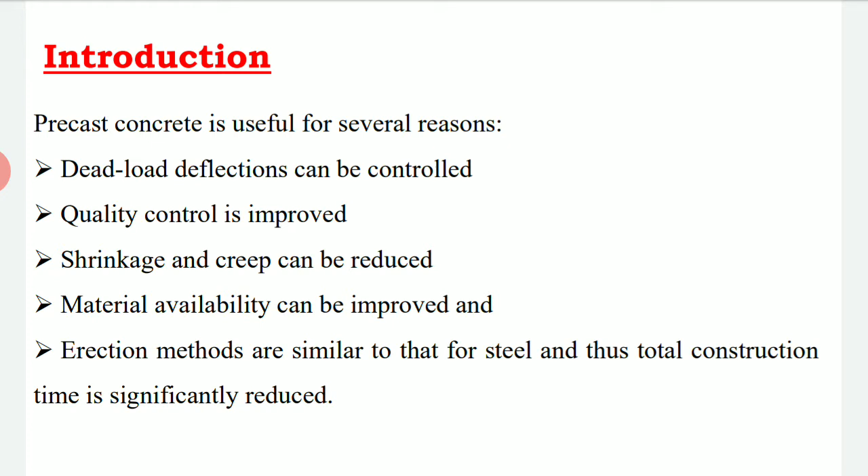So every stage, from start to end, is well planned in the system, so that we can achieve better quality, and even the cost can be reduced with respect to time. So the time also can be significantly reduced in the construction process.

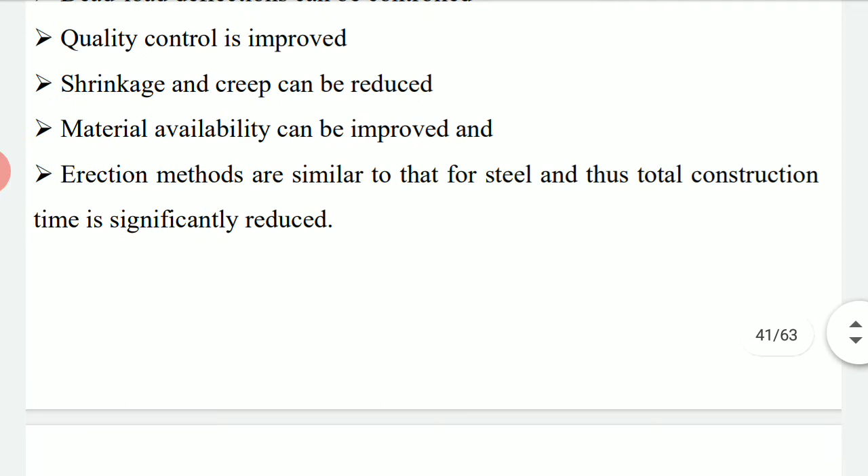Here we are having the different methods in accelerated curing. These are the two main methods used for the accelerated curing process: the use of physical processes, and here we have two different processes - the first one is the physical process and the second one is by using admixtures.

The first one, the use of the physical process, is increasing the curing temperature, that is the introduction of moisture to the curing environment. In the curing process we need to increase the temperature by using heat curing and all, and at that time we can even call it steam curing.

So by using that temperature, the heat of hydration - I mean the hydration process - is going to be increased, and whatever time that hydration process would take, it can be completed earlier by using this increase in temperature.

The second one is the use of admixtures. Here we have different types of admixtures: mineral admixtures as well as chemical admixtures. These admixtures act as the catalyst for the hydration process - catalyst in the sense that these are elements which change the entire reactions in the concrete, especially in the curing part, changing the reaction which takes place in the hydration process.

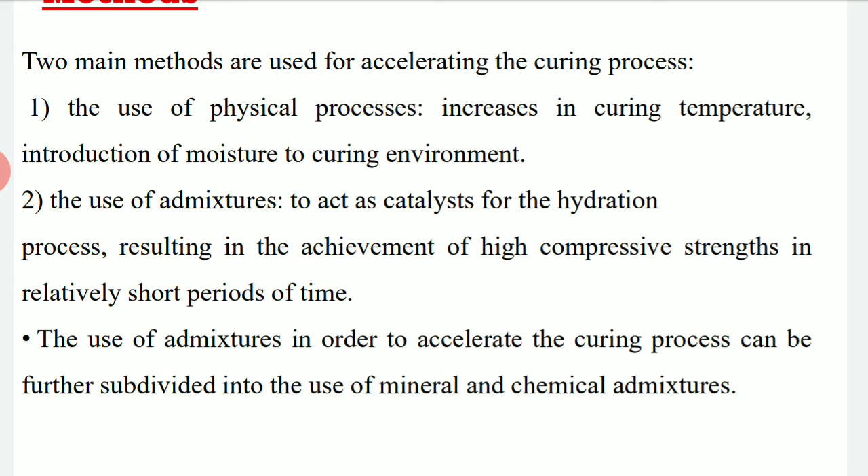Now we are going to study mineral and chemical admixtures, especially in the curing part. The most common mineral admixtures used as an accelerator include silica fume. Mineral admixtures such as fly ash and GGBS are rich in silica content, which acts as the accelerator, especially silica fume.

Fly ash is frequently used to improve other properties of concrete, especially workability, and even the heat of hydration can be minimized by adding fly ash. It has a retarding effect on the initial set and early strength gain of the concrete.

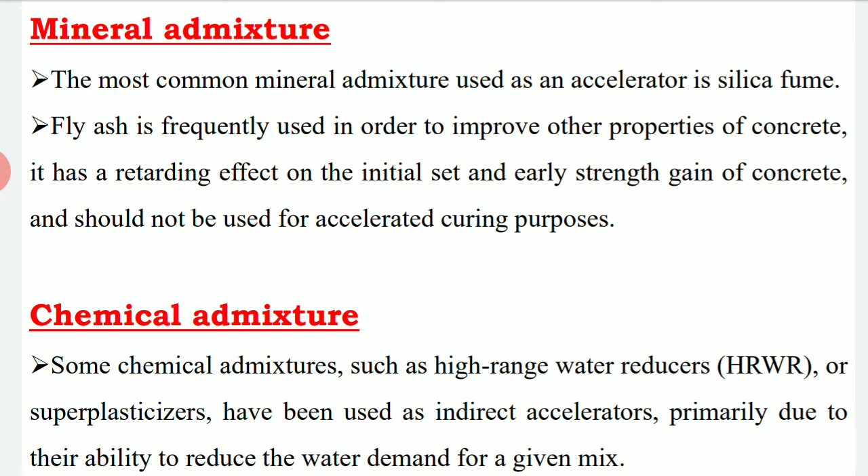It should not be used for accelerated curing purposes. Now coming to the next part, that is the chemical admixtures.

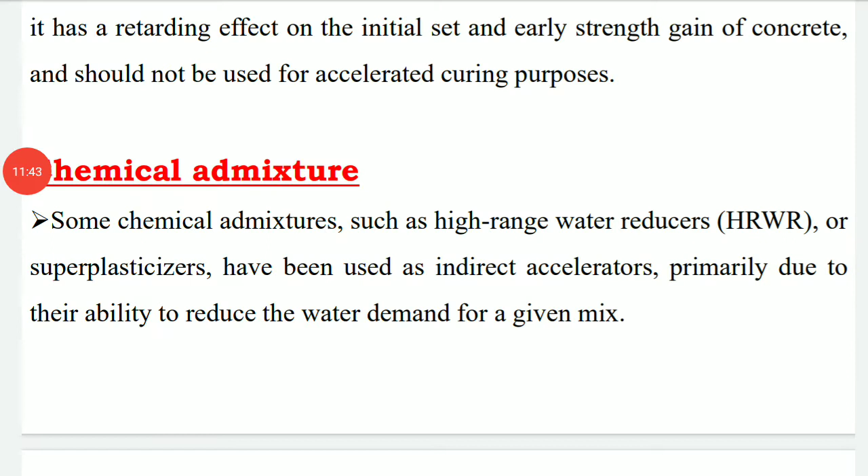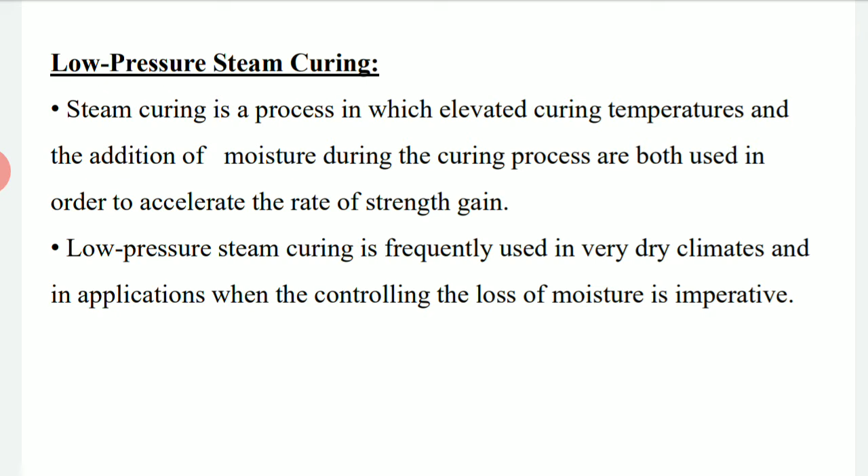Low pressure steam curing is frequently used in very dry climates and in applications when controlling the loss of moisture is imperative. During the summer season, the temperature will already be high, so we can provide low pressure steam curing such that minimum temperature and current room temperature can be applied on the concrete surface, and the curing process can be done using these elevated temperatures.

Coming to mineral admixtures for accelerating curing: fly ash can be used as a cement replacement material, and it can reduce even the heat of hydration process in concrete structures. Fly ash is one of the byproducts formed by modern power plants, a coal combustion byproduct collected by electrostatic precipitators used to filter combustion gases. It is basically a waste product generated wherever coal combustion byproduct is produced, so in such places fly ash is available.

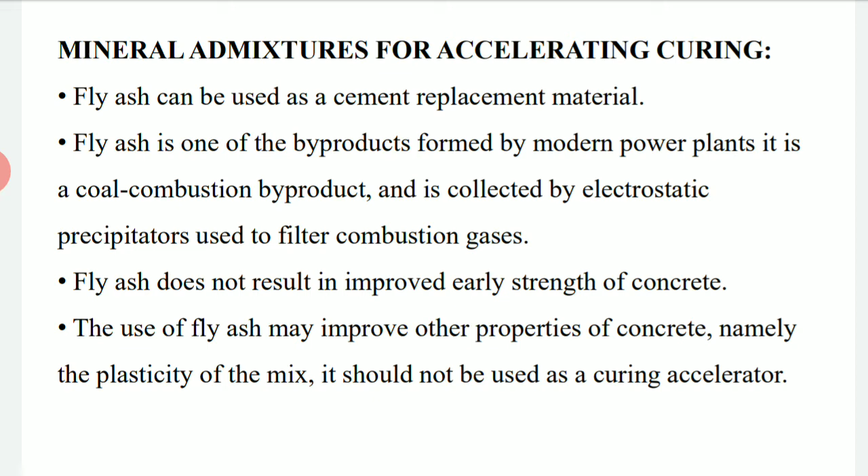This material is already burnt, and most of its elements are ready to use. However, fly ash does not result in improved early strength of the concrete. Simply adding fly ash cannot increase the compressive strength or any type of strength of the material. It requires a certain amount of binding materials, specially made using cementitious materials such as lime, to achieve the particular strength along with the fly ash. The use of fly ash may improve other properties of the concrete, namely the plasticity of the mix, but it should not be used as a curing accelerator.

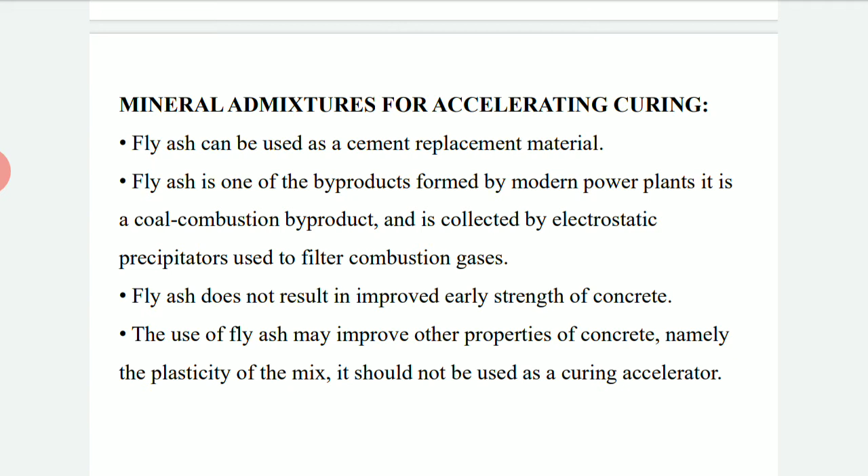When we add these high range water reducers to the concrete, they reduce the total water content required for workability. This way the moisture content can be easily absorbed and dried off.

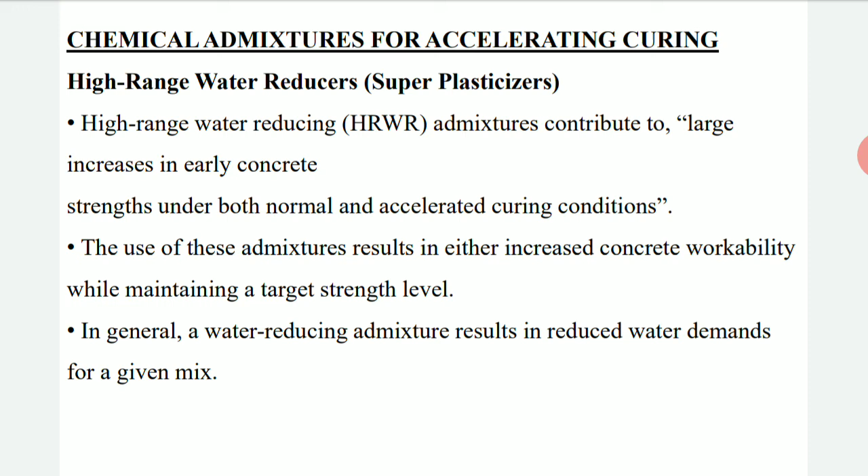In general, water reducing admixtures result in reduced water demand for a given mix. In cases of water scarcity, we can use these high range water reducers to replace the total quantity of water by adding just a few drops of admixture. This achieves the same workability as adding water content, reduces the water content needed, and achieves the same strength we would normally get after 28 days, but in less time.

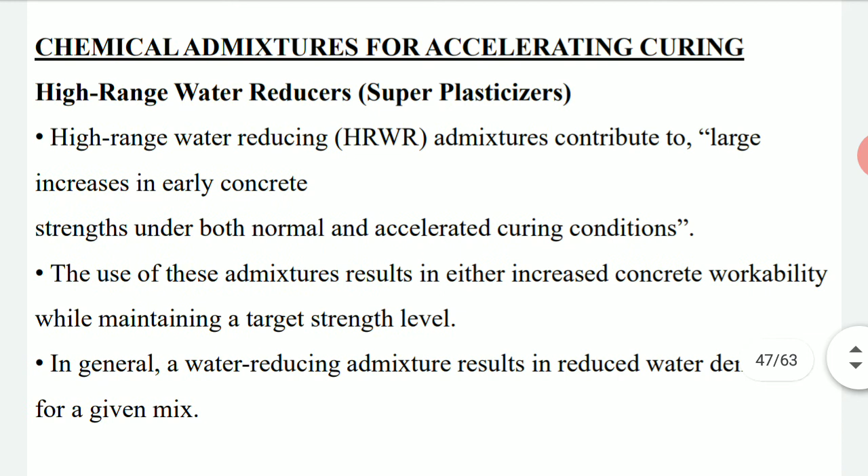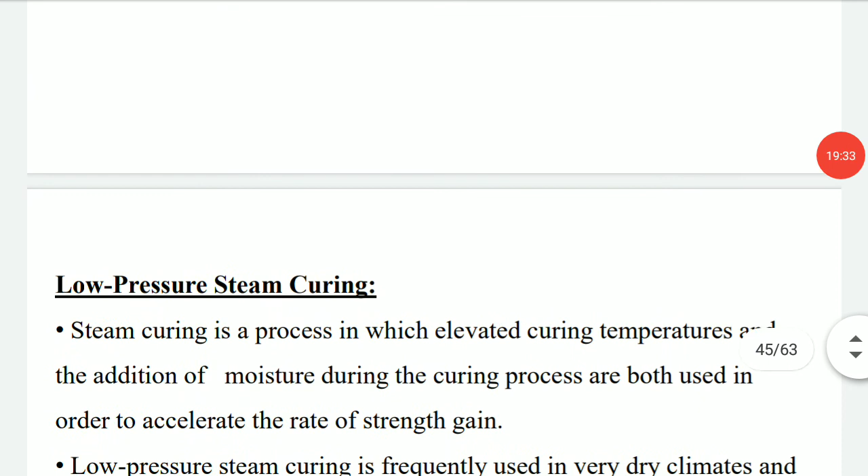So these are the different types of admixtures used in the accelerated curing part. We have two different categories of admixtures: physical mineral admixtures and chemical admixtures.

We'll also look at different types of other curing periods, specifically the physical process curing temperature and the addition of moisture in the curing environment, which belongs to environmental aspects. Just as a revision: using the physical process of increasing the curing temperature increases the total temperature in the environment, so that by using that temperature we can control the total curing time.